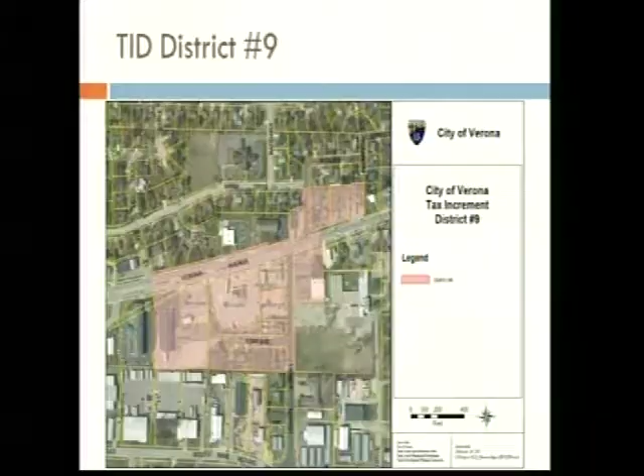There is a map of that proposed district boundary. There are actually several maps, but the one specifically on page 8 is the boundary map. A couple other elements of the project plan I'd like to remark on are the project costs. As I mentioned, this is a tax capture mechanism with the idea being that the taxes from the increased development are used to pay for the projects. The plan, which is just a plan—all expenditures would still require future council authorization at the appropriate time, as well as a development agreement related to the redevelopment project—calls for up to $9.3 million in total expenditures. There's a detailed table found on page 18 of the plan, but it generally breaks down as $1.85 million for public infrastructure.

That might be monies borrowed by the city and used primarily to improve the intersection in the vicinity of Legion Rita and Verona Avenue. There's also a requirement to upgrade some sanitary sewer and water services within the area to allow for redevelopment. So that's the first component.

The second component would be up to $6.8 million in potential development incentives, grouped into two categories. One would be for the primary development to the southwest at an estimated $5.4 million. The balance of $1.4 million is a placeholder for a potential redevelopment in that northeast corner of the intersection.

Lastly, we've got costs related to the interest that the city would expect to pay on the publicly financed improvements within the TID, as well as ongoing costs of administration through the life of the district. That interest expense and administrative costs total $588,000.

In terms of what the city would expect to realize as a result of the investment, it would be approximately $40 million in total development, with $31 million coming from that southwest area and the Sugar Creek Commons development project, and the balance of roughly $9 million coming from that northeastern section.

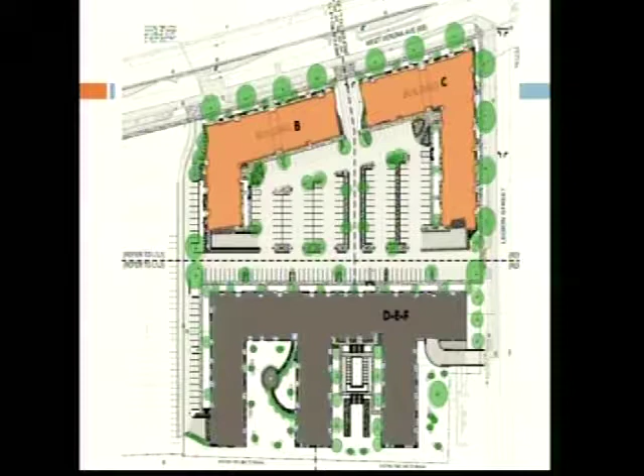We feel it's sufficient. Furthermore, the Plan Commission and the Council would still have control over high traffic uses such as restaurants and fitness centers. So if parking were to become an issue on the site, we would have the ability to review those uses on a case-by-case basis. The applicant is proposing as part of this project vacating Top Avenue.

Top Avenue would be vacated along the current cul-de-sac portion of it. Staff is supportive of that, but the applicant will need to work with the property owner here regarding access to that property because the site is served by a driveway. That is a detail that can be worked out once the applicant attains ownership of the property and can legally request the vacation of that road.

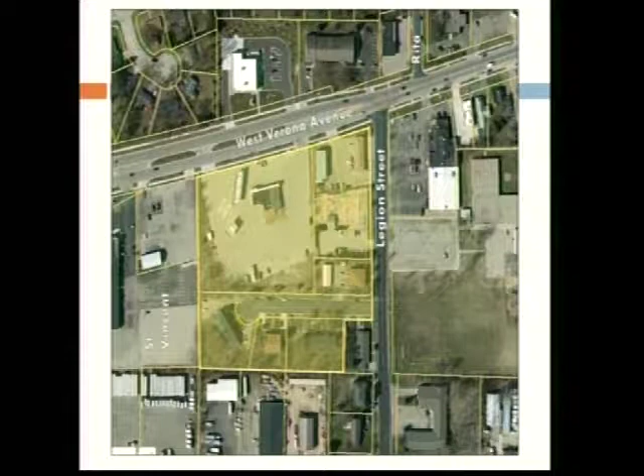The site itself, looking from an aerial view towards the southwest, we have Verona Avenue along the frontage, and then Legion Street running along through here.

There was a landscaping plan that was submitted with the proposal. Staff did have comments and provided those to the applicant. There are some changes that need to be made to that landscaping plan to meet the minimum point requirements of the zoning ordinance. If the project is recommended for approval, staff would recommend that a condition be placed requiring a revised landscaping plan be submitted.

The applicant is proposing to use high-quality materials such as brick, cast stone, and LP smart side plank siding. There'll be a lot of glass, especially along the commercial space and along the residential units above.

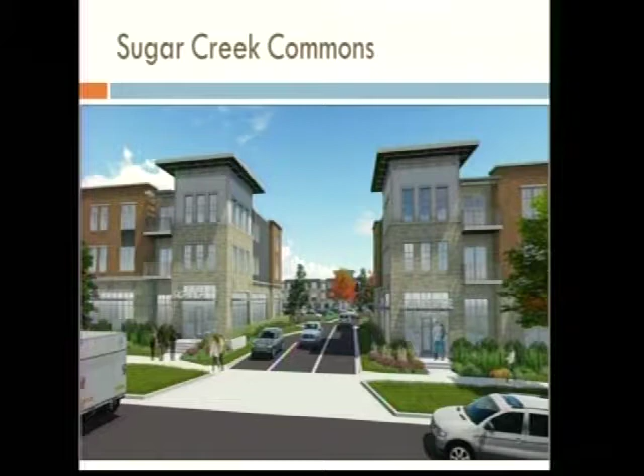Staff is supportive of the designs that the applicant is proposing. It's a variety of materials, and it's consistent with what we're looking for for redevelopment along West Verona Avenue.

Some of the amenities they're proposing include 2 courtyards planned within the multifamily portion of this project. One would have some type of gathering space, and the second one would have a feature such as potentially a pool.

There were some PD exemptions that were granted as part of this project. Those exemptions included a parking reduction, where the applicant requested using a lower ratio number to calculate the parking for the site. Building height, the applicant identified 3 stories instead of a 35-foot tall building. And finally, density, the applicant has requested a density of approximately 35 dwelling units per acre when looking at the site itself, and approximately 27 dwelling units per acre when looking at the entire redevelopment, including the hotel site.

So those were exemptions that were granted as part of the GDP process. In general, staff is supportive of the redevelopment of these properties. Of importance to staff will be ensuring the site is properly cleaned and capped for redevelopment, as Mr. Taves previously explained in the TID request.

With the redevelopment of these lands, the city would begin to create a destination and a commercial district along West Verona Avenue. So with that, staff recommends the Plan Commission recommend the Common Council approval of the PIP for the Sugar Creek Commons with the following conditions.

One, the PIP shall become effective upon Forward Development Group acquiring the properties identified within the application boundaries. Two, Forward Development Group shall enter into a developer's agreement with the City of Verona. Three, prior to the issuance of building permits, the applicant shall submit a revised landscaping plan that conforms to the city's landscaping point requirements.

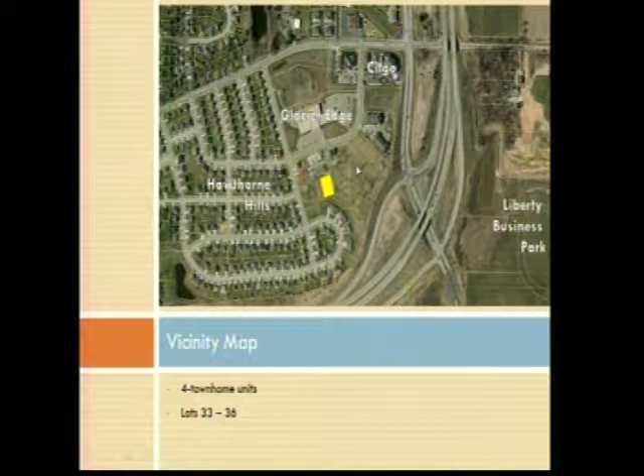There is one last block of 4 vacant townhouses that could be built — this is the last townhouse in this development. The developer has sold off the portion of single family in this area. That project has recently started, with basements currently being put in on that site. So the developer is proposing to construct these 4-unit townhouses on lots 33 through 36.

The property is zoned urban residential, our multifamily zoning district, and this is part of a larger PUD for the area. From a bulk standpoint, these townhouses would be consistent with the previously approved townhouses to the west and north. Staff is comfortable with the width and location of the proposed building. Access to the site would be from Schubert Street, a shared access with the townhouses to the west, so it's a single access point. The buildings would have 2-car garages, consistent with other projects in this area.

This is the existing townhouse currently west of the site. This townhouse was actually relocated from Kimball Lane last year and moved to this spot. The applicant is proposing a similar design building, a different color but same design — they're looking at more of an earth tone look, with similar details and accents, very similar to what has been previously approved out there.

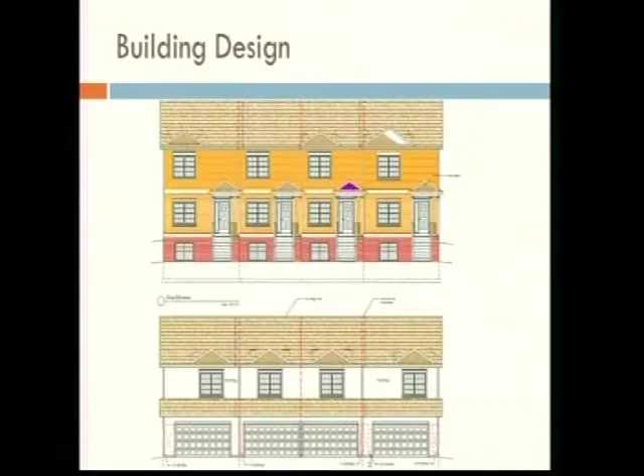The one comment from staff is regarding landscaping. Staff is recommending additional landscaping be planted along the south property line to screen this building from lot 32 of the adjacent residential subdivision. The applicant would need to submit a revised landscaping plan, most likely some arborvitaes or evergreen trees, to screen that site. Additionally, this project requires an erosion control permit to be issued by the city engineer. In general, staff is supportive of the request tonight.

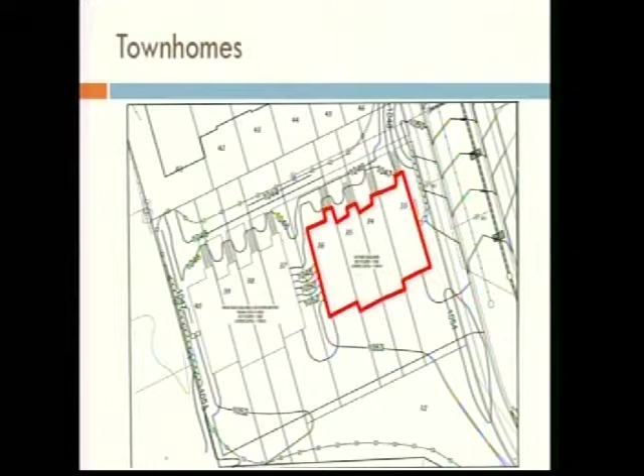Once again, this would be the last townhouse building that would be constructed. Staff recommends the Plan Commission recommend Common Council approval of the PIP for lots 33 through 36 of the Hometown Grove subdivision with the following conditions: first, prior to issuance of building permits, the applicant shall submit a revised landscaping plan that provides full screening of the adjacent single-family lot to the south; and second, the applicant shall obtain an erosion control permit before starting construction.

I believe the applicant is here tonight, he'd be happy to answer any questions you have. Thank you, Mr. Sarah. Questions, comments from Plan Commission members?

Questions, comments, or any potential motions? Again, the motion would be to recommend to the Common Council. Mr. Manley, I'll make the motion to recommend approval to the Common Council. We have a motion by Mr. Manley. Is there a second? Seconded by Mr. Turk. We have a motion and a second.

Any further discussion on the motion? Mr. Horsfall: just with the two comments already listed, right? Okay, fine. Actually I do have another question - does this, being townhouses, count towards the mixed use, or is it already pre-approved so it doesn't count? Mr. Sarah: the residential phasing policy? It could be counted towards that if the council directed staff to. This has been here for so long, my general feeling would probably be no, because of all the changes that have occurred over the last 12 to 15 years in this area. But it could be. I'm not recommending it does, I'm just wondering.

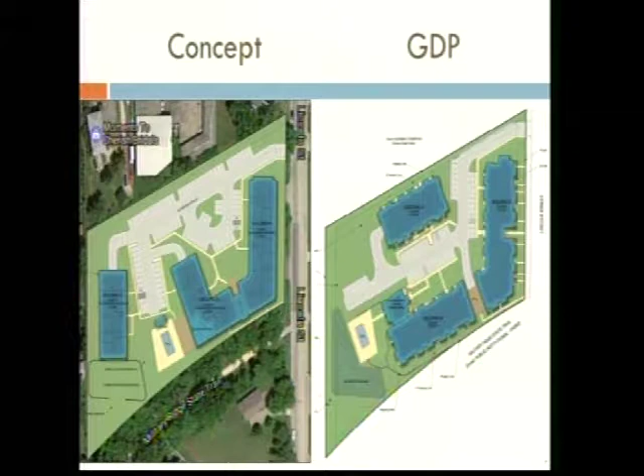Access to the site has been provided from Lincoln Street. The access point has been pushed the furthest north, as the architect indicated, to provide potential shared access in the future to redevelopment that could occur north of here. Initially, staff has no concerns with that access point since it's on the northernmost lot line. An existing stormwater easement does run through this property, which was discussed at previous meetings as well. That easement runs through here.

It does convey water from the north side of the city into the channel behind City Hall here and ultimately into the Badger Mill Creek. That is a north-south easement, a 60-inch pipe in the ground there. There's also an east-west pipe that conveys stormwater, which is a 42-inch pipe as well.

As part of this project, the applicant is proposing to keep that pipe as is in place. They would have parking constructed over that, but the pipe would remain as is. A full stormwater management plan would be reviewed if this project moves forward.

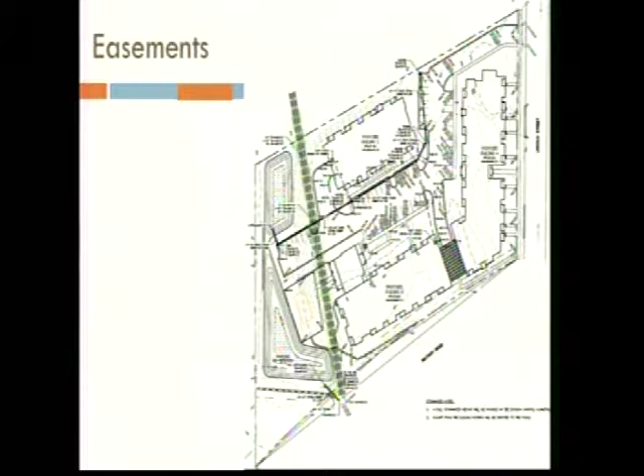Conceptual landscaping plans were included in the submittal. Similar to some comments made tonight, staff would recommend significant screening along this west property line, which is actually required by ordinance as a buffer yard. That could be a combination of landscaping and fencing. I would encourage the applicant to work with the neighbors in that area to find out their preference. Staff's preference, as Mr. Hanker alluded to, is a combination of quick growing landscaping and larger mature trees, which usually works out best long-term versus a fence.

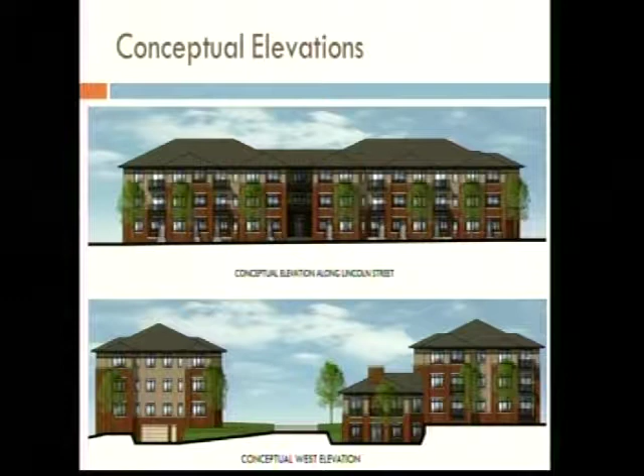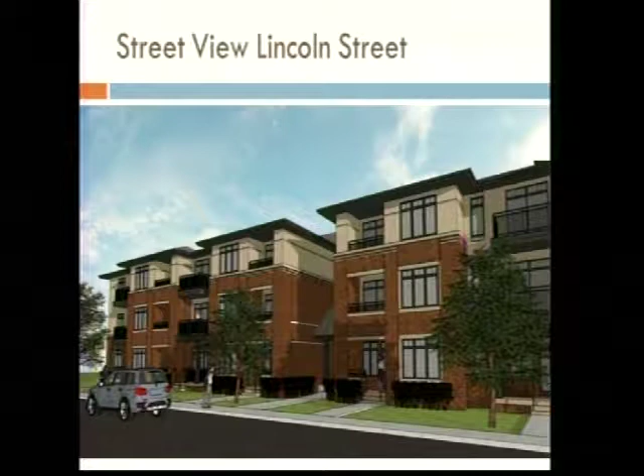Conceptual elevations were also included in your packet. The applicant is proposing a prairie style type architecture using high quality materials. Staff has no concerns with the designs or the looks of the buildings. I think it's a good fit for the city and matches similar projects we have in the city. The city's comprehensive plan did include a conceptual layout with potential density for this property.

Staff does not support the density of this project. The fact of the matter is it's not consistent with the plan we adopted three years ago, and it needs to be reduced to be consistent with that plan. Also in the staff report, there is a comparison of other projects in the city based upon density. Probably the closest comparison to this project is the Sugar Creek Commons project, which was recommended for approval tonight. That project is at approximately 34 dwelling units per acre, depending on how you calculate that.

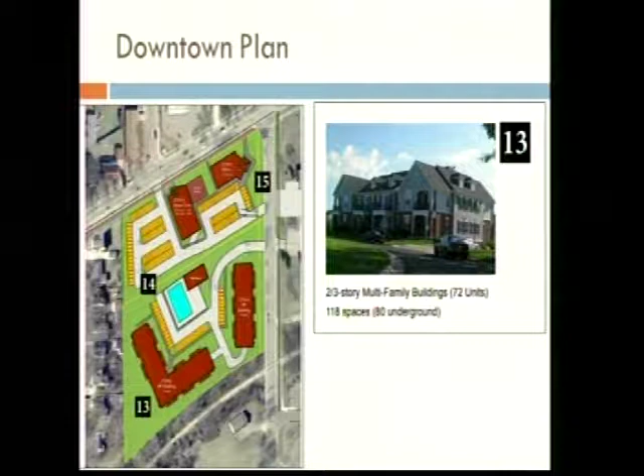So to wrap it up with staff comments, in general staff is supportive of the redevelopment of this property as a multifamily land use, so long as the density is reduced. We believe it's too dense for the site, too dense for what was planned in the downtown plan. The current concept is inconsistent with the downtown plan for this property, and changes to the development proposal are necessary to ensure it conforms to the long-term plans of this area. Although the applicant has reduced the building height from the conceptual review, the number of units actually increased by one. Staff encourages the applicant to reduce the density of the project and work with surrounding property owners. So with that, staff recommends the Plan Commission recommend the Common Council deny the general development plan located at 102, 104 Lincoln Street. I'd be happy to answer any questions you have.

Thank you, Mr. Sarah, for the additional information. Questions, comments, or potential motions at this time?

Mr. Manley: Thank you, Mr. Mayor. I want to begin by commending the developer and the group working with them for meeting with the neighbors and listening to the concerns brought up at the meeting earlier this year, making changes that clearly demonstrate they took a lot of that to heart. I think that's definitely appreciated.

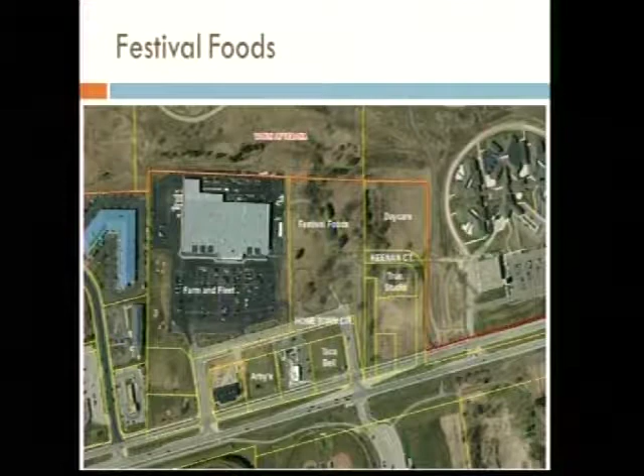So the building is being proposed here east of Farm and Fleet. It would be set back approximately 273 feet from Hometown Circle. As part of this process, the applicant is requesting a setback exemption from the Downtown Overlay District. If you recall, that district has a minimum setback of 15 feet and a maximum setback of 25 feet. So the applicant is looking to set the building back at a similar setback to Farm and Fleet. Staff is comfortable with that setback exemption.

The side yard setbacks currently, the westernmost one, would not meet the paved setback requirement because it is shared parking with Farm and Fleet. Staff has no concerns with an exemption for that because it is shared parking. And currently the site plan provides an east lot line setback that would not meet the paved yard setback either, but the applicant is looking at potentially purchasing additional land to the east, and as part of that they could complete a CSM that would meet the paved setbacks. So staff has no concerns with the setbacks as they're provided on the site plan.

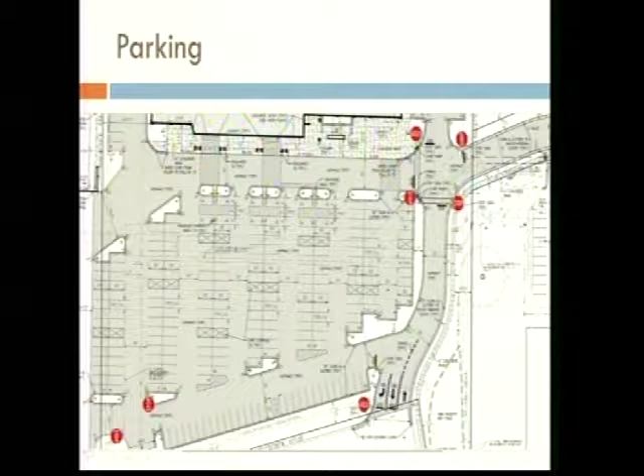Sidewalks have been provided along the east side of the site. This would connect into the sidewalks along a crossing over Hometown Circle in this location. Staff has no concerns with the sidewalk as provided. One recommendation from staff would be to extend the sidewalk on the north side of Keenan Court. There's a daycare contemplated east of here that's putting in sidewalk, along with potential parking for True Fitness Studio. I think adding the sidewalk on the north side will be beneficial, and just for the safety of people on this roadway.

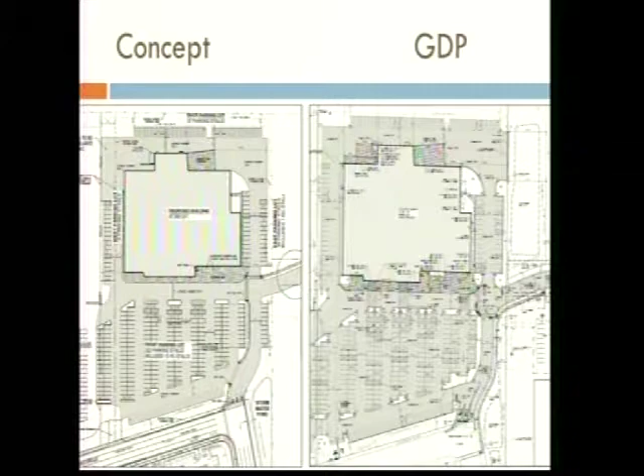The design itself, I'll go back to the exemptions. To summarize, we have the side yard pavement setback exemption, the building setback, and a minimum parking aisle width exemption. The typical aisle width required by city ordinance is 26 feet. They're requesting a 24-foot width, which is typical elsewhere and quite common. So staff has no concerns with that exemption, especially since they're making the actual parking spaces slightly longer than we typically find.

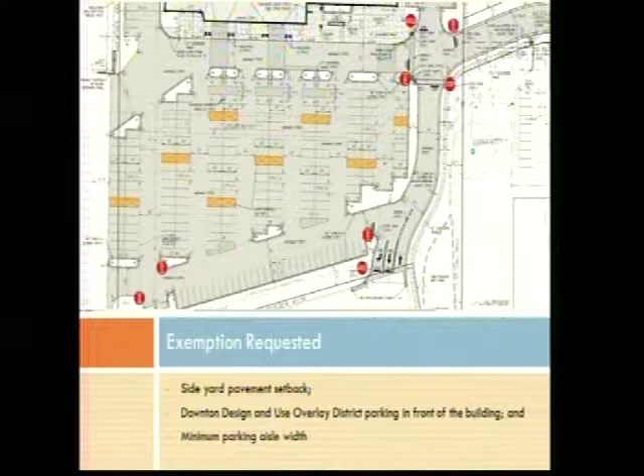As part of this, they are not proposing any additional monument signs, but they are proposing to locate on the existing Blain's Farm and Fleet signs. Staff has no concerns with the location of what they're looking at for signage.

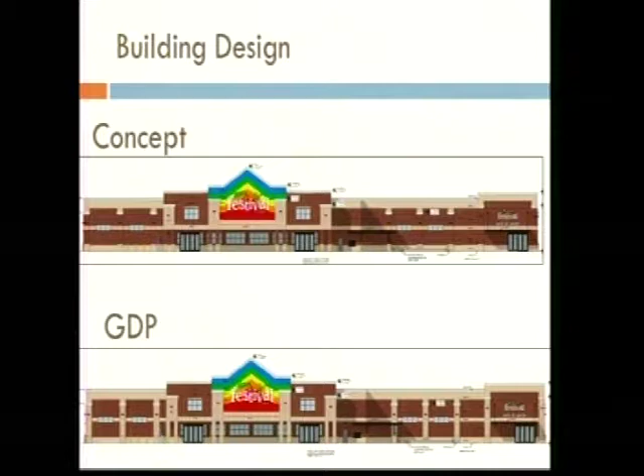Before you is the building design. On top we have the concept, and below what's been submitted for review tonight. Changes from the concept include additional stone along the columns throughout the site. Initially there were about 4 major pillars; they've extended those across the front from top to base, and also extended it down the whole face of the front of the building. So they've made the changes requested by staff, adding additional stone materials to the site. The applicant is proposing to use CMU and stone on the project.

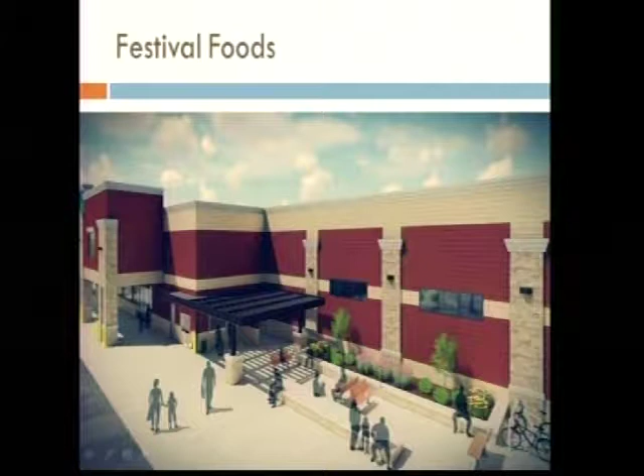Looking at perspectives towards the north and west, they'd have 2 access points into the store, one along the east side for wine and spirits, and a main entrance in the center. They're also proposing an outdoor gathering space with a brat stand that goes along with the grocery store, and at the request of staff, an outdoor gathering area that could be used for landscaping and outdoor seating.

Staff is comfortable with the design of the building as submitted. It's similar to Farm and Fleet. Furthermore, the outdoor area adds an enhancement to the site as well.

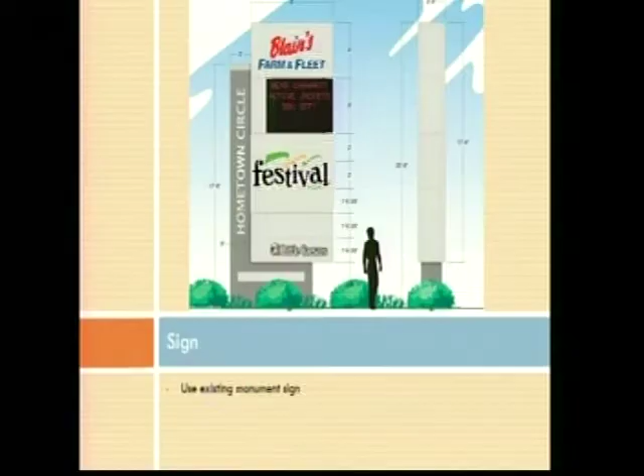One of the comments tonight was regarding landscaping for the property. The applicant did provide a conceptual landscaping plan. The Ice Age National Trail is located north of the site on Dane County property in the town, owned by the county. The applicant is proposing extensive landscaping along the north side of this property at the request of staff, to screen the trail from this building, using a combination of evergreens and deciduous trees.

As part of this, initially in the concept, the applicant did request an exemption from the city's landscaping requirements regarding green space. The revised submittal does meet all of our landscaping requirements from a green space standpoint. Furthermore, the applicant has added additional landscaping islands in the parking lot, which will help break up the asphalt in this area.

Long-term, this site was actually planned for a grocery store when the Farm and Fleet project came forward. There was a conceptual grocery store on the Farm and Fleet plans that provided a 60,000 square foot grocery store in the location where Festival is planning on going. So the proposed plans and use are consistent generally with the plans that were reviewed 10, 15 years ago.

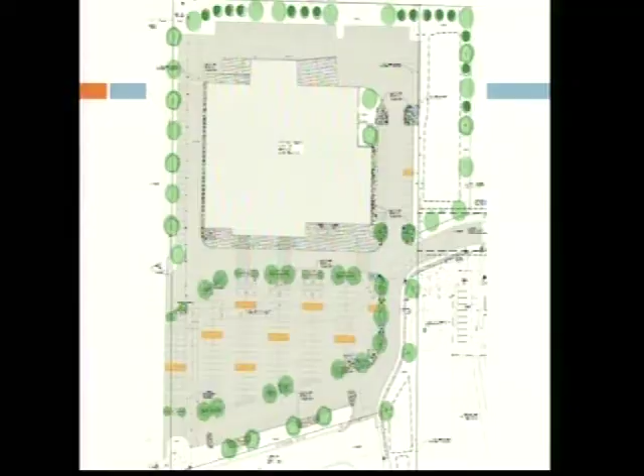So staff recommends the Plan Commission recommend to the Common Council approval of the GDP for Festival Foods with the following conditions: one, the GDP shall become effective upon Festival Foods or the applicant acquiring the properties identified within the GDP; and two, prior to the GDP becoming effective, the city and Festival Foods shall enter into a store rehabilitation vacant store agreement.

And with that, I'd be happy to answer any questions you have. Thank you, Mr. Sayre. With that, we will open questions to the Plan Commission. Questions, comments, or potential motions? Again, if we were to make a motion, it would be a recommendation to the Common Council. Questions, comments, motions? Mr. Manley, please.

Thank you, Mr. Mayor. Adam, could you expand a bit more about the second contingency that's proposed, the vacant store agreement, and what that is and what that entails? Sure, it would be probably some form of development agreement where if the store were to become vacant after a set amount of time, the building would have to either be removed by the applicant, or even potentially beforehand there could be funds that were either escrowed or deposited, or however that could potentially work, such that within a set amount of time, if it's vacant, the city could potentially remove the building.

We'd also want to build into that flexibility to ensure that if there's a plan in place, if it does become vacant, and there's the ability to split the building into multiple users, we want to be flexible and have that agreement accommodate that. But it's more intended to protect the city if the building were to become vacant and sit for a long period of time. These types of buildings, just because of their size, can be difficult to lease, and we want to ensure that if it's vacant, it doesn't attract blight and graffiti. So the intent is that on the front end we'd have the ability to address the blight, versus trying to do it after the fact when the building's vacant and closed.

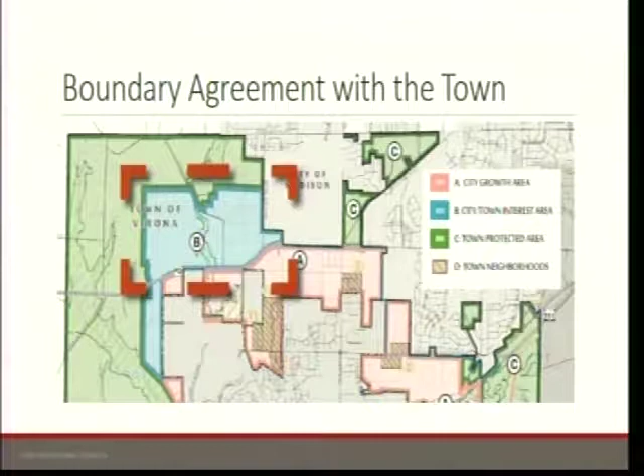Next slide. This area is identified as a city-town interest area that is ultimately a city growth area, a second tier of city growth as envisioned and agreed to in the boundary agreement.

Very few revisions. The only thing noteworthy is that we clarified since the June draft that there is some greater capacity to serve with water the higher elevation portions of this planning area than we originally thought.

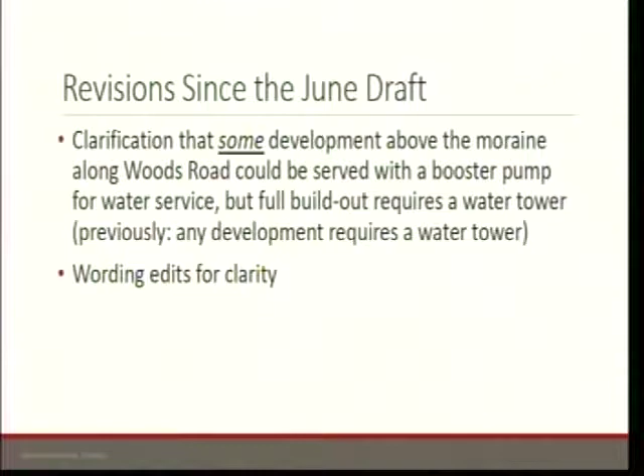If you proceed to the next slide, Adam, I'll point out that in the far east off of Woods Road, and in the far west, there are ridges. The far east has the moraines, and the lands above the moraine are at higher elevation.

What we had been saying is none of that can develop until there's a water tower. What has been clarified by staff is that some of that could be served with a booster pump, so that area could be partially developed with a pump. Full build out would require volumes at pressure that would really require a tower. That's really the only clarification or edit since the last draft.

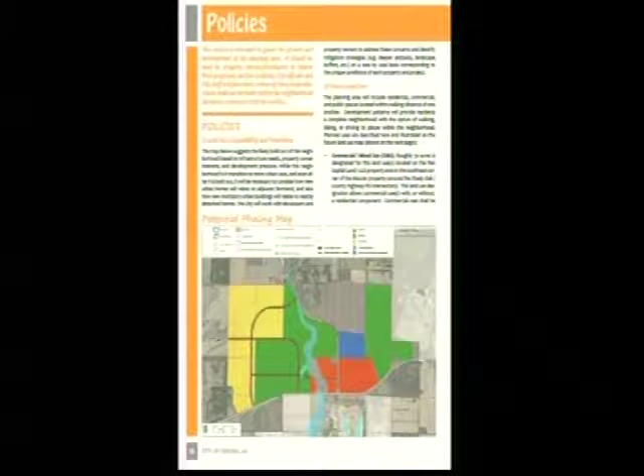If you go ahead, Adam, this is a page from the draft plan. This map showing concentric circle colors of red, green, and yellow is a rough guess as to possible phasing, the ways this area might develop: red first, green later, yellow last. It is not a policy map, not an attempt to establish policy, but rather simply to say this is what we expect may happen.

Next page. The bottom half of this page shows the future land use map, and I'll roll through a few slides to talk about each of the land use types. First we have the suburban residential category, which is most of the area.

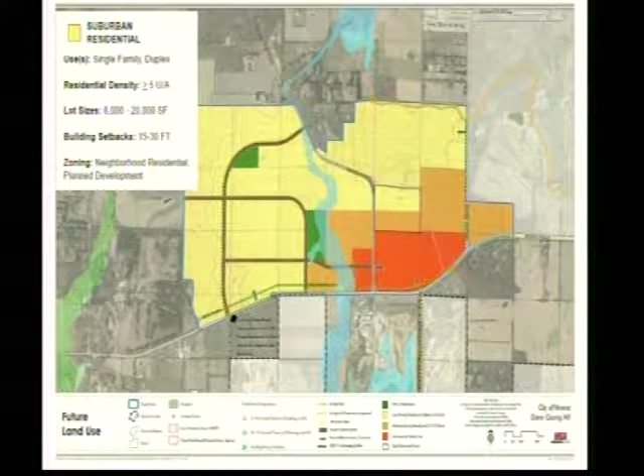The intent is 5 units per acre or less, 8,000 to 20,000 square foot lots, building setbacks roughly 15 to 30 feet from the street. Zoning would be neighborhood residential or planned development.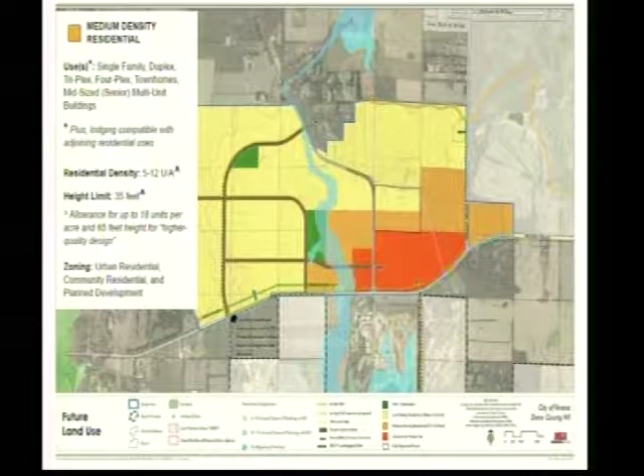The next slide points out the orange areas, which is the medium density residential, which could include single family duplex, but then multifamily of various types and sizes, with residential densities of 5 to 12 units per acre, a height limit of 35 feet, and an allowance for greater height up to 65 feet if that comes with higher quality design. That higher quality design is described in the design guidelines in the plan. Zoning could be urban residential, community residential, or planned development.

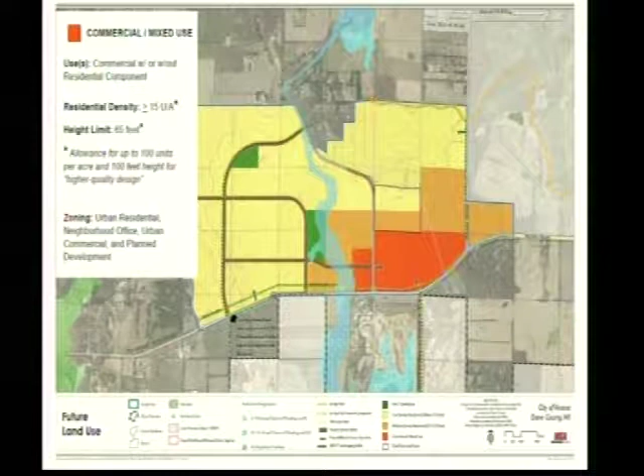The next slide describes the red area on the map, identified as commercial or mixed use. This area could have density of at least 15 units per acre and heights of up to 65 feet. There would be allowance per this draft plan for up to 100 units per acre and up to 100 feet, again with a stipulation for an expectation of higher quality design. Zoning options that could apply: urban residential, neighborhood office, urban commercial, and planned development. So clearly the most intensive potential development in this area.

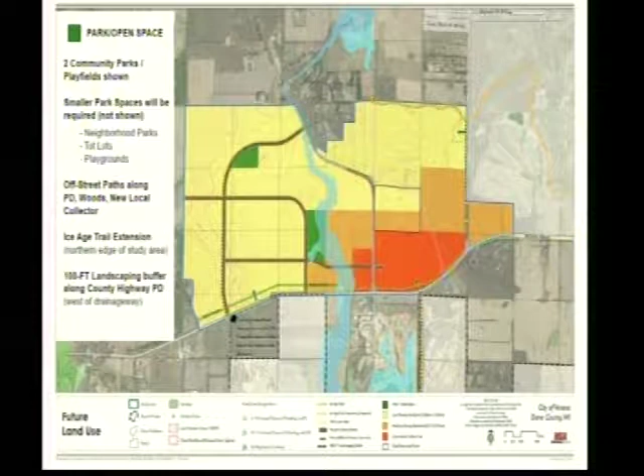The next slide here describes the green portions identified in the plan. Two community parks and playfields are shown, but there would also be smaller parks not specifically mapped here. There are some off-street paths. The Ice Age Trail extension is mapped as a dotted line across the north edge in the northeast quadrant of the planning area. Also called out is a 100-foot landscaping buffer along County PD.

The last few slides here just repeat all of the design guidelines that are in here. We have some on building heights first, which talk about that allowance for greater height and the expectation that would come with that for high quality landscaping and site design, bike and bike parking amenities.

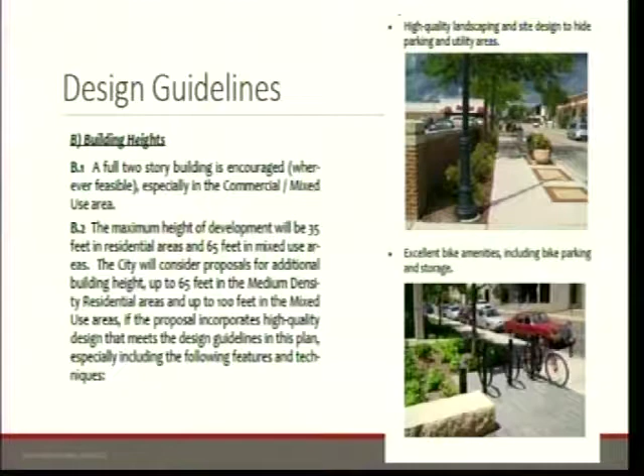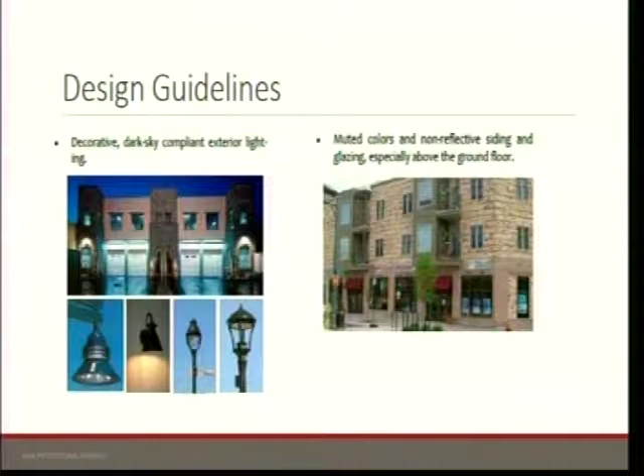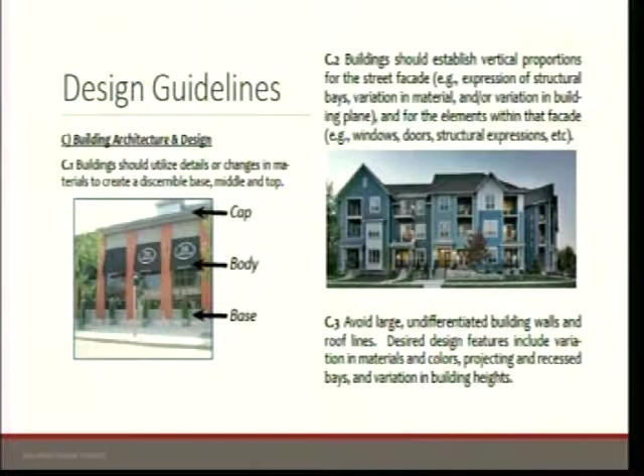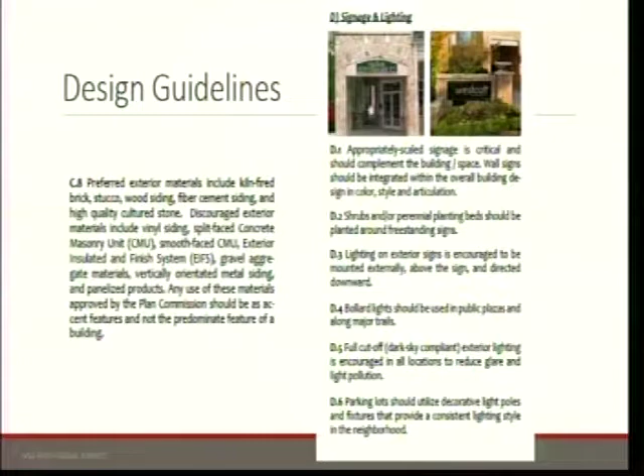I'm not going to go through item by item, but wanted to point out there's quite a bit of content there, and that these are guidelines, but they would be the expectation for anything that would exceed those height and density limits in the red and orange areas described in the plan. So that's my summary. I can entertain questions now, and I'm available as you have them later.

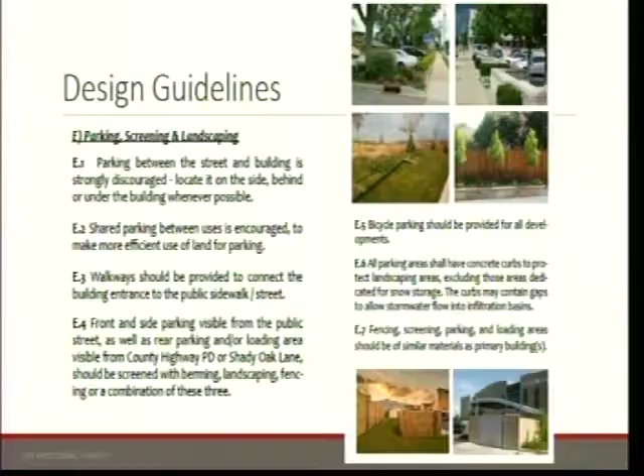Thank you, Jason. Any questions for Jason at this point? If not, we may take you up on your offer for questions a little bit later. Is there anyone from the public that wishes to speak on this agenda item? If so, please come forward.

We would ask you to state your name and address, please. I've already signed the sheet. My name is Joe Tucker. I live on Shady Oak Lane in the town of Verona. I have three brief comments, but first I'd like to give you a petition for the record, signed by many residents who oppose what we see as one of the results of this neighborhood plan, that being annexation and development of the 65-acre Pan Capital parcel. Most of the signatures are from residents of the area, either within the boundary you're discussing or just adjacent to it. These are people who feel they and their neighborhood would be negatively affected by the proposed Pan Capital project.

On the map I'll give you, the areas shaded in red or crosshatched represent areas within which the people signing the petition live, so a lot of people in this area are in opposition to this. Where the areas are not crosshatched or in red, it just means we don't know, because we didn't get a chance to ask everybody. So I'd like to give you this. Where shall I give this?

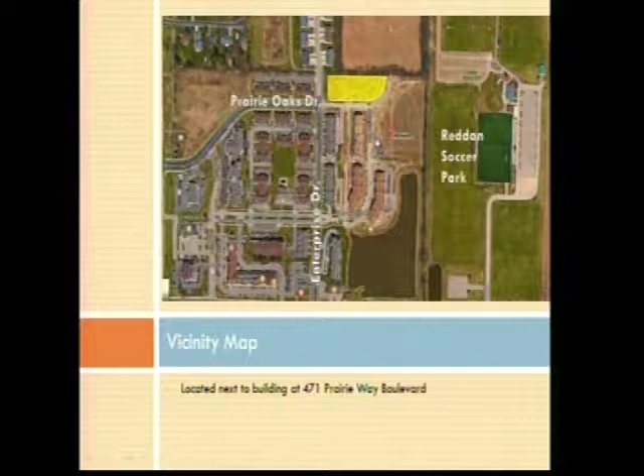These 3 apartment buildings, one of which is under construction but has now been completed, are the Murray Glen townhouses. Those have been completed and built as part of a larger planned development that we approved in 2013. So the building itself would be an extension of the general development plan approved for this project. The general development plan actually planned for this site to have 32 apartment units on it. That was the initial plan.

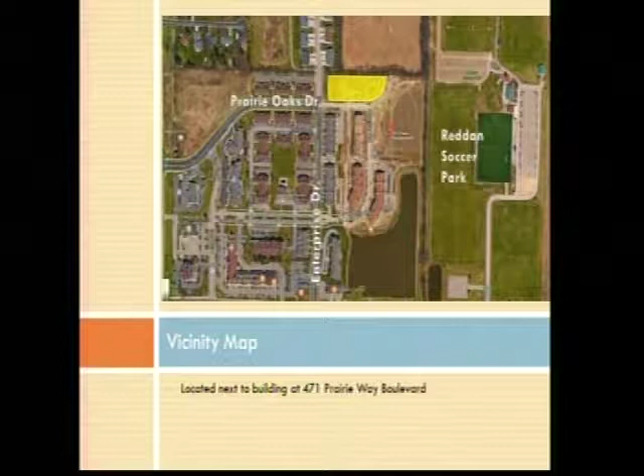The intent is still by the applicant to have 32 units. In this case, though, it would be a change to a memory care facility instead of just straight apartments. Plans were submitted by the applicant and are on the screen before you. The building itself would front along Prairie Oaks Drive.

Access will be provided from Enterprise Drive on the west and also Prairie Oaks on the east. There'd also be a service access point across from Knoll Manor. This facility is intended to be almost a dual facility with Knoll Manor. There's a great amount of demand, which the applicant who's waited around tonight to hear this item can speak to as well. But from a setback standpoint and a building placement standpoint, staff is comfortable with how this building is being placed on the property.

Parking is one item that we'll work through with the applicant since this is a memory care facility. Parking will be mostly just provided for the employees and the guests. Furthermore, the applicant has indicated they would enter into a shared parking agreement with their property across the street, which could serve as overflow parking for this site. There is ample parking across the street, surface parking and underground parking, so staff doesn't have any concerns. This parcel is currently 2 parcels, so as part of this, the applicant would need to submit a CSM to combine the parcels into one.

From an architectural standpoint, there were some conceptual renderings submitted in the packet. It is a single-story structure that takes on a lot of the features that Knoll Manor has. Initially here, staff has no concerns. They're proposing to use stone and brick type material similar to Knoll Manor and also similar architectural treatment and details.

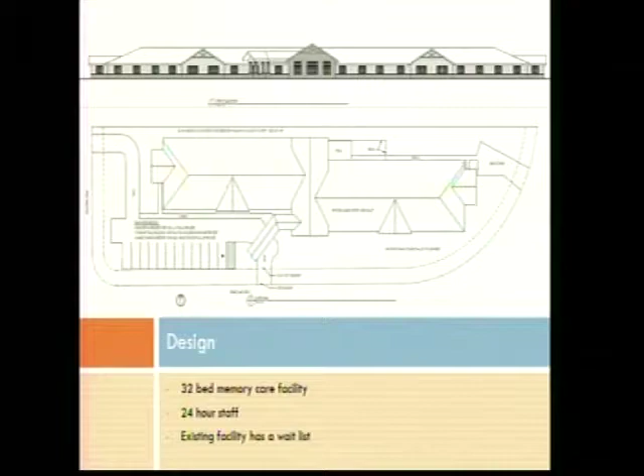So based on our experience thus far with the current facility that we have within the walls of Knoll Manor, we decided that we would do the last phase, our third phase, or fourth, on this development and make it all memory care. Thus, we'd be able to provide more rooms, and it's not just Verona, it's the expanded community that are our residents, and also meet a really substantial need.

So the 32 units, a relatively simple building, but we do want to tie it into what we currently have because we're very proud of that. I think it's a very nice structure. It's extremely well received by the residents, and I think very well received by the community. It would really be an extension of that.

A couple little details that you may or may not notice on your drawing. There is not a kitchen within that. We have a substantial serving area and kitchen dining areas within Knoll Manor. The food preparation would take place within Knoll Manor, and then on the east side of the property, you can see the access corridor that is really strictly for the food service portion of it to wheel it over there. We will have a warming type kitchen inside that facility to take care of the residents' needs.

Anybody within the community or on the Plan Commission have questions regarding this facility? Are there any questions at this point for Mr. Bunns? Mr. Horsfeld, please. I'm not one to jump density, but is it a single-story building?

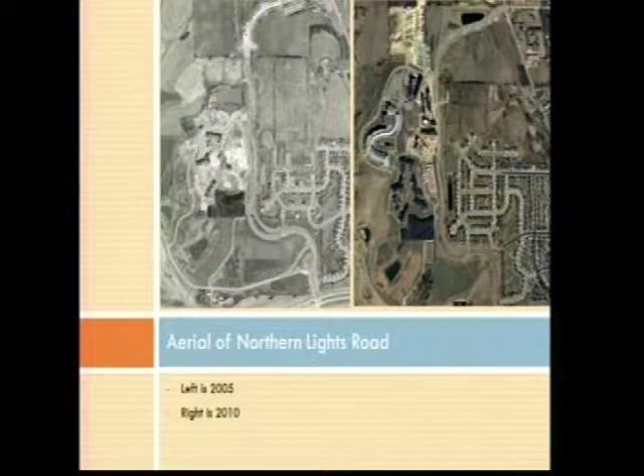Thank you. This is kind of a cleanup matter. I think we've briefly discussed this before. This is a recommendation tonight to the Common Council regarding renaming Northern Lights. As part of the reconstruction process with the lands out there, Northern Lights has been re-signed, but it needs to be officially renamed. In short, it was realigned back in 2013, 2014, and then fully realigned last year. So what we're looking at doing is changing this straight through the intersection from basically Verona Avenue all the way up to PD, calling that officially Northern Lights. We'd have North Nine Mound Road, which would stop at the intersection here, and then we'd take the old North Nine Mound Road and call that North Nine Mound Court. Cross Country would remain the same.

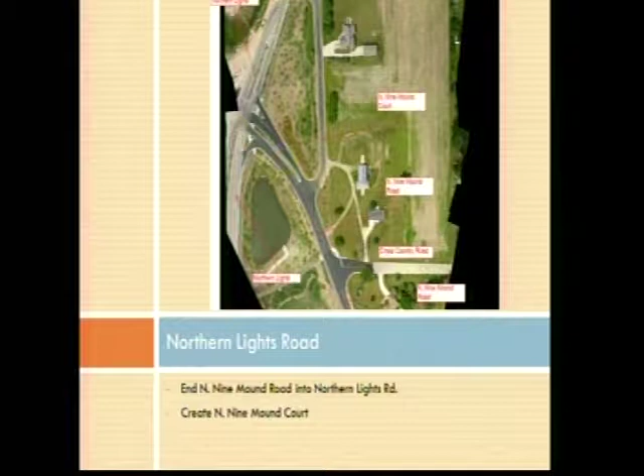Before you tonight is the draft ordinance that will go before the Common Council, and staff is looking for a recommendation tonight from the Plan Commission on this item. The only thing that will change for the houses on this road is changing it from North Nine Mound Road to North Nine Mound Court. The addresses will not change, so we see it as a very minor procedure. Staff recommends the Plan Commission approve the name change for North Nine Mound Road to North Nine Mound Court.

Mr. Sayre, is this a recommendation to the Common Council? It is a recommendation; it'll go to Common Council, and by statute we will hold a public hearing at the council meeting next Monday night as well, and the council has the ability to adopt it by ordinance. Okay, thank you.

Mr. Horsfeld: At this time, I'd like to make a recommendation to the Common Council to approve the name change for North 9 Mound Road to North 9 Mound Court. We have a motion by Mr. Horsfeld. Is there a second? Second by Mr. Turk. Questions or comments on the motion? Seeing none, all those in favor signify by saying aye. Aye. Opposed, no. The motion carries.